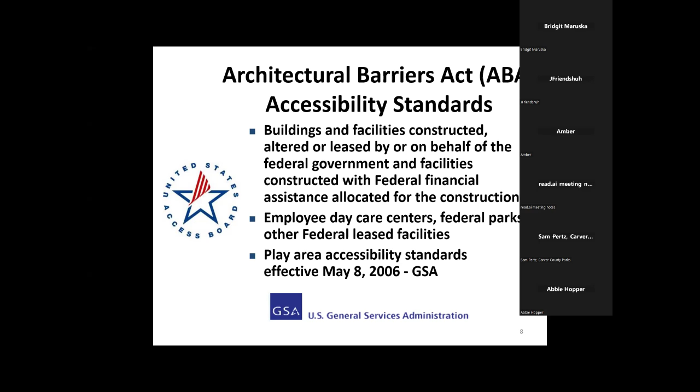And why that's so important is that persons with disabilities like myself—if I went into a bathroom on a federal Park Service or Forest Service toilet room, and then went into my city or county local toilet room, or went into the McDonald's on my way home, or used the bathroom at the hotel I'm staying at—the idea that those minimum requirements are the same throughout all those facilities helps people with disabilities understand if I can do that independently, which is the goal. That's our goal of providing access: making sure people of all ages, all abilities have as much independent access as possible.

And so if I can't do that independently, I know I need help everywhere I go. And that's an important feature with the standards. Really what the Access Board worked on was to make sure that we consolidated those requirements, easier for designers, easier for people with disabilities to understand that the requirements are across the board now.

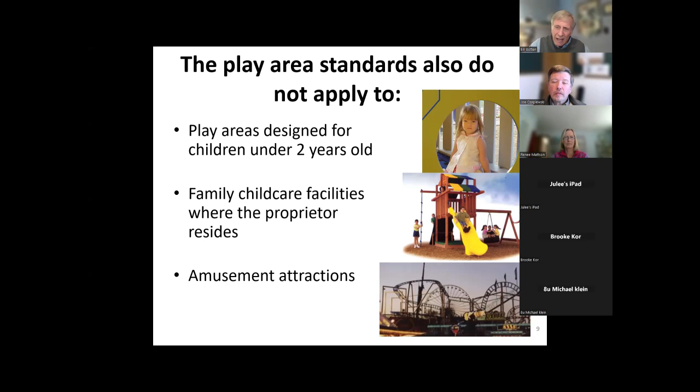The play area standards also don't apply to play areas designed for kids under 2, those really small ones. If your family has a child care facility at your home and you live there, and amusement attractions are not considered a play area.

I told you earlier on that if you have the 2010 ADA standards, you don't have the whole book. Because it references other things, like for platform lifts, for elevators, for fire alarms, and for playground surfacing. Not knowing all the technical requirements for play surfacing or having the expertise, standard setting agencies rely on other organizations like the National Fire Protection Association, the International Building Code. They rely on other voluntary standard organizations to develop standards for specific issues like elevators, platform lifts, fire alarms, and playground surfacing.

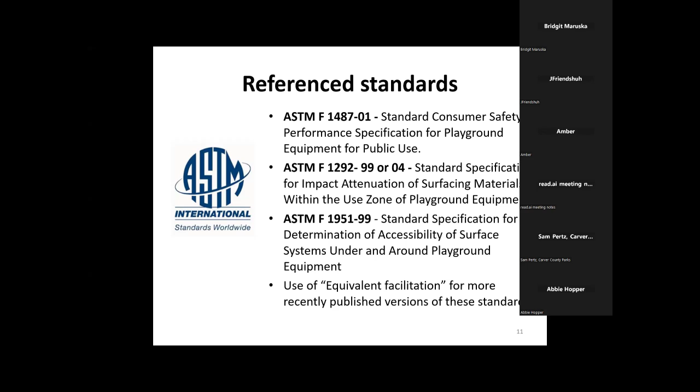When you talk about playground surfacing, it's ASTM International. And ASTM International has 3 different reference standards that apply in play areas. The first one, 1487, defines what we call the use zone. And I'll talk more about that in a second.

1292 requires you to have fall attenuating surface. If somebody takes a header from 6 feet, 8 feet, 10 feet, 14 feet, you need a surface that protects at all those different levels. That reduces the level of injury. So there's a test where they drop a head form, and I'll show you more of that in a minute, where they drop a head form and take an evaluation of your surface material.

If your surface material is freezing, it's probably not being very fall attenuating. You really need to consider that the surface you're putting in is something that, over time, is going to facilitate access through your environmental cycle, right? And if you're going to do a unitary rubber surface, you need to know exactly how long that's going to last. You need to test it throughout its life cycle, to make sure that kids are not in danger.

Typically, when I've seen litigation on play areas, it's because somebody got hurt first, and then they look at the accessibility as well. But typically it's the lawyers for those that got hurt who are coming out to see if your surface is compliant. That's typically how it works.

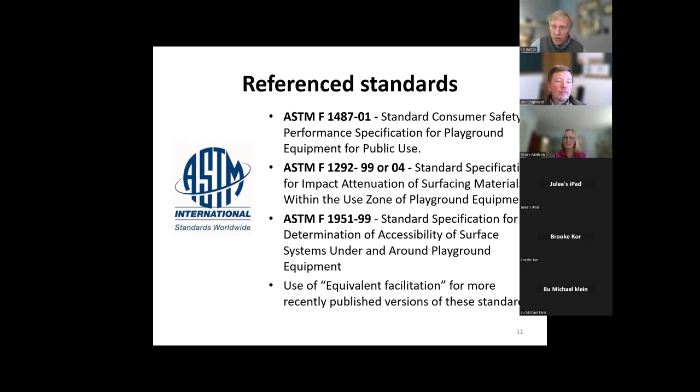ASTM F1951 is the wheelchair workability requirement. It basically talks about how hard it is to push through a surface like engineered wood fiber, push through rubber tiles, push through a turf surface. So you have these competing factors, right? You have this requirement for you to provide accessible routes so somebody in a wheelchair can get there, but also that it's soft enough so that when somebody falls, you're preventing as many injuries as possible.

I told you that 1487 is that use zone requirement. Based on the height somebody would fall, there's a circumference or a diameter all the way around that play component that establishes where that surface has to be fall attenuating. So typically when you're way out by the sidewalk and just coming into the play area, that surface often needs to still be accessible, but it doesn't need to be fall attenuating because you don't have a piece of play equipment that somebody would fall from.

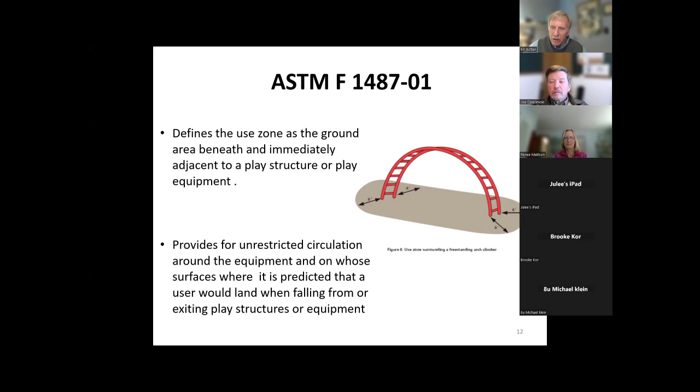Now, when you're in a motor vehicle, the HIC is only 700. I fought for years to try to get that 1,000 lower to provide surfaces that were more accessible, but it hasn't come through as a standard. So there are areas like even riding in a vehicle where the HIC is lower, and on sports fields it's lower than in play areas, but play areas still allow a very high, in my opinion, head impact value.

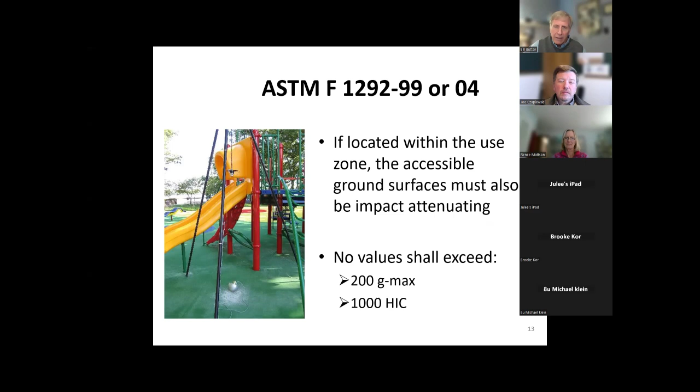It measures the amount of work somebody uses to push those wheels to go up, and then what it does is take that playground surface and install it in a test bed, and you go for four pushes on a 90-degree turn and in a straight line. As long as that surface doesn't require more force than it did to go up that 7% grade, your surface is good to go.

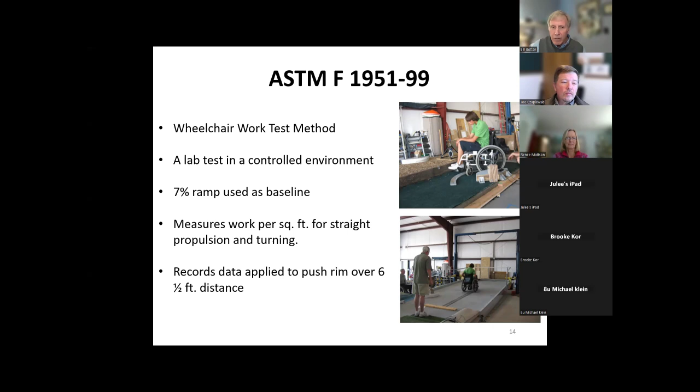There is not a field test right now for this. That's what I've been working on for more than 20 years, and I'm still chairperson of a committee in what we call the Rehabilitation Engineering and Assistive Technology Society of North America, RESNA, where we're hoping to be able to evaluate all kinds of surfaces—trail surfaces, play area surfaces—for firmness and stability, because that's the requirement for accessible routes. But right now, this is the requirement for wheelchair workability.

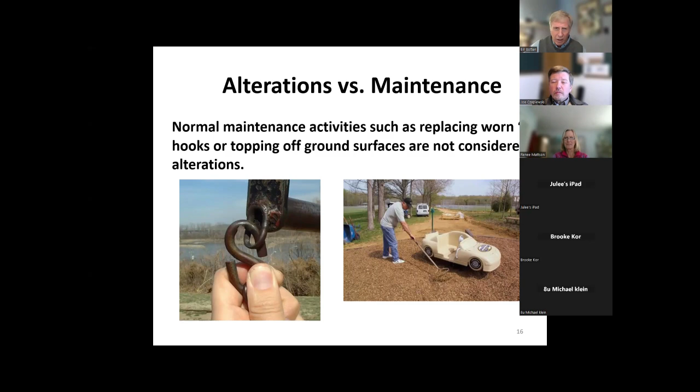But if you're doing something we consider affects usability, that's the real key. Does it affect usability? Like changing the surface material affects usability because it's scoped. So understanding the difference between: is this normal maintenance, am I replacing it to just like it was, am I just making sure it's safe and not going to hurt anybody, or am I actually changing the usability of something, changing a different play component?

Alterations that could affect or do affect the usability of a play area are considered an alteration. Examples could include removing a climbing or play component and replacing it with a spring rocker or some other type of play component, or changing that ground surface—that would affect usability and is considered an alteration.

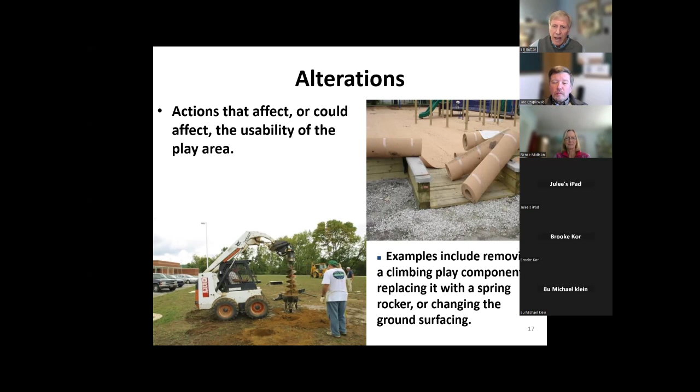When you do an alteration to what we call a primary function area—I'm on slide 18—there's this additional obligation. It doesn't only apply to recreation facilities; it applies, say, if you had a building and you altered a classroom, or altered the main reason somebody comes to it, like a visitor center lobby. If you alter a primary function area, there's an expectation that you provide what's called a path of travel obligation. That means we don't have just these pockets of altered primary function areas—in this case, a play area—there's an expectation that now you try to get people to that altered primary function area.

So it's 20% disproportionality—that's the rule set by the Department of Justice. The expectation is that when you alter, you remove the play surface and do a new play surface, you've now altered a primary function area. In that alteration, you now have an additional obligation to get somebody to that altered primary function area, up to 20% of the total cost of that alteration.

More of that information can be found at the Department of Justice website, and I'll give you that when we're done. But it's so important to think about whether you're altering this primary function area—there is an obligation to make sure somebody has, maybe, a parking space to park at, an accessible parking space, maybe an on-street space, maybe a passenger loading zone at a school. But then the accessible route—that route that connects from that site arrival point, maybe through the park to the playground—now has a requirement that you spend up to 20% of that alteration cost. There is an opportunity to use small projects over a series of multiple years, combining that money to come up with the overall cost of what the alteration to a path of travel might be.

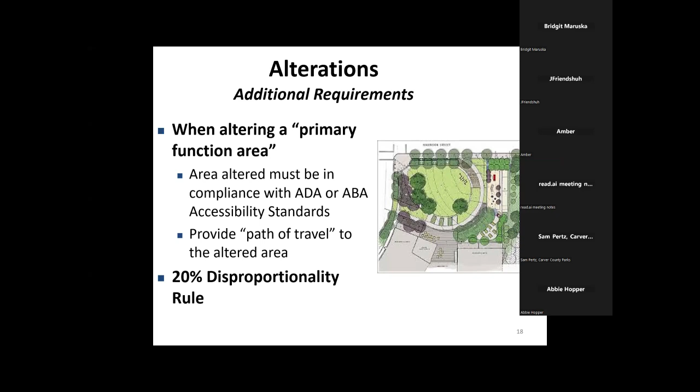So when we talk about path of travel, we're talking about altering a primary function area. We're not talking about the way that somebody goes—we're talking about that requirement for additional money to be spent towards the accessible route of getting people to that altered primary function area.

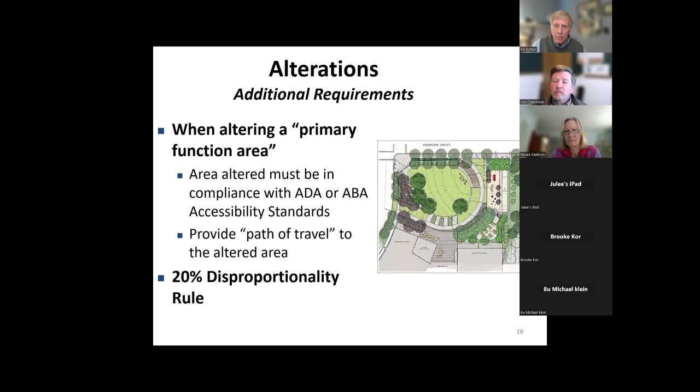I'm going to clarify some terms as we move into the next idea. We went through some application issues, right? We talked about when it's required, what law requires it, and when you have an opportunity to do it on existing facilities, alterations, or maintenance.

Clarifying some terms of the application of the play area standard - they have to define what a play area is. It contains play components designed and constructed for children. It's really designed and constructed for children and adults, I think it should have said.

I don't like to see this. Imagine the trip hazard that causes between surface material types. My kids always knew how long my arm was - they'd be at the edge of that turf exactly that length away when it was time to go home, or if they did something wrong, or I wanted to come get them. That's how they knew how long my arm was.

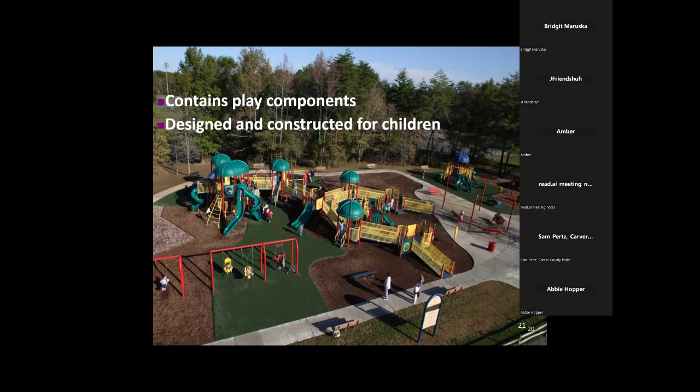Access to the full play area is how we make them inclusive. That's how we ensure everybody has the same opportunity to run, play tag, and do everything - not stay on the hard surface, not stay on the areas defined to be accessible, but the whole area.

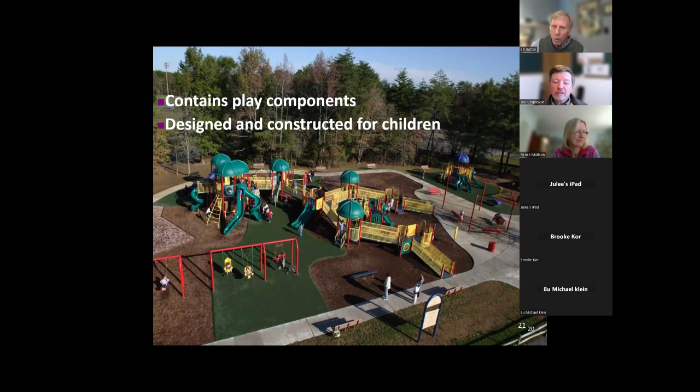There are requirements for outside the play area - I'm showing you a route coming over to a play area. Once you get inside the play area, accessible route requirements change. Just one example: outside the play area, you can have a 36-inch route for up to 200 feet before you have to go to 5 feet just so somebody could pass. But once you get to the play area, now you have a 60-inch, or 5-foot wide, route throughout the play area connecting those elements required to be accessible.

The important thing to understand is you have to connect elements and spaces on the same site with at least one accessible route. That's the real trigger - all elements and spaces on the site have to be connected by at least one accessible route. Here I'm showing a hard surface that went all the way behind this play area, but they've got this other route that comes up to it. I drew that white line to emphasize that now we're going into the play area and the requirements are different.

That's not a curb. But the idea here is that you only need one route to a play area, and that one route needs to be accessible. You could have another route that has stairs, or is a steep slope, but you're going to have one route that gets somebody with a disability on an accessible route, hopefully the common circulation path.

That's a really key thing - don't send the person with a disability around to the backside when everybody else just comes to the front. The idea is that the whole family goes together. So the real route to this play area is shown here as the family walking together. That's the common circulation path, and it should also be the accessible route.

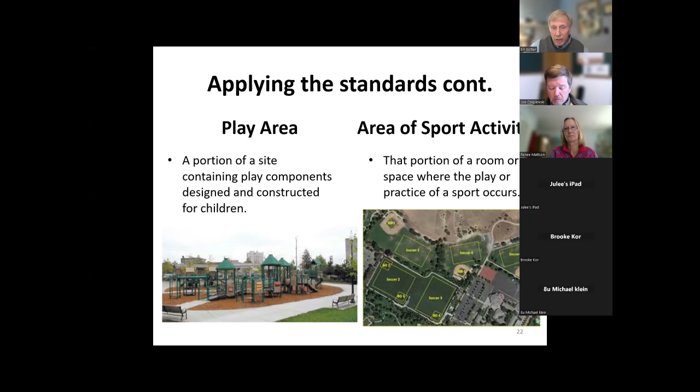If you separate your play areas geographically, one side of the building to the other, you're required to make sure that both of those comply in new construction and whatever you alter.

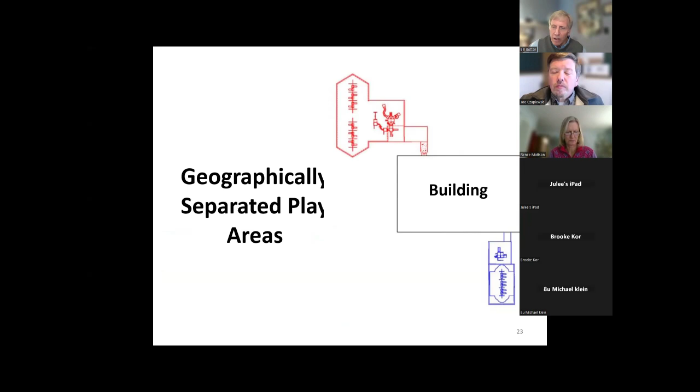So what's a play component? It's designed to generate that opportunity for play, socialization, and learning. Now a lot of manufacturers will start saying, I have upper body climbing, I have lower body climbing, I have a bumpy slide, a circular slide, a wavy slide, and they'll try to type a whole bunch of different things. Really look at the expectation here. The standard talks about sliding, swinging, climbing. It really breaks it down to, when we talk about one of each type being accessible, that you break it down to the real form of what's happening there.

Sliding, swinging, rocking—here you see one on the left where they're digging. The idea is that one of each type is going to be accessible at minimum. When we talk about nature play components: felling a tree, putting a bunch of rocks, making a grass mound, a turf mound—there's a big emphasis to make urban parks more rural, like climbing on a tree. The expectation here is you still get to it, you still get through it. One of each type still has to be somewhat accessible to get to.

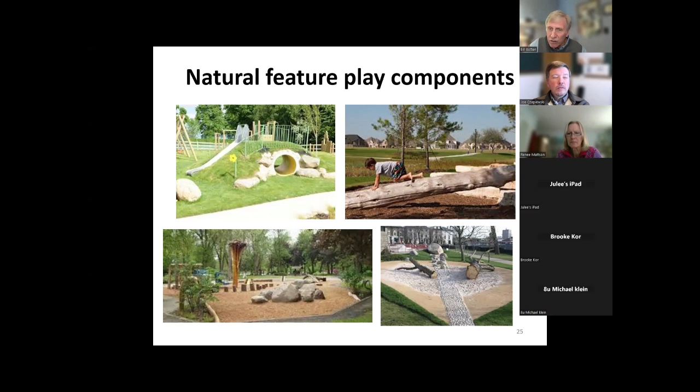So the surfacing material would be the key factor. If you're creating mounds and putting things on top of mounds, it's going to be considered a composite play structure. Once you create a composite play structure, you're required to either provide transfer or ramp access to the top. If it's just a mound, you could get somebody off at the bottom and they scoot and climb and roll on the mound. But if you provide a whole bunch of elevated play components on top of your mound, now you're going to need either a transfer system or a ramp to get somebody up to it.

What's not a play component? The transfer system, the steps, the decks, ladders, roofs. Your kids might be on the roof, but that's not considered a play component.

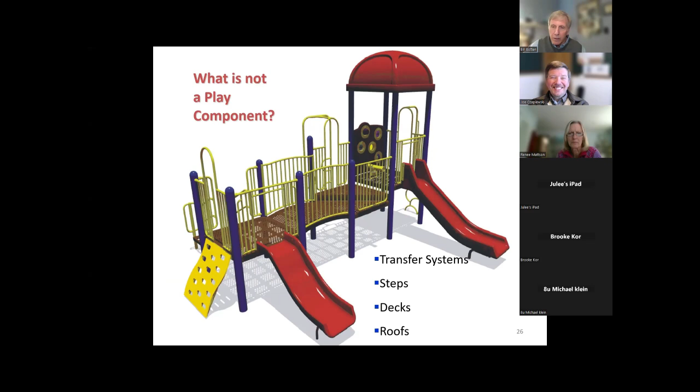Ground level play components are approached and exited at ground level. I'm showing you some ideas here—this thing you spin in makes you sick, the swing on the left-hand side, or this whale coming out of the sand. Those would be considered ground level because you get on and off at ground level.

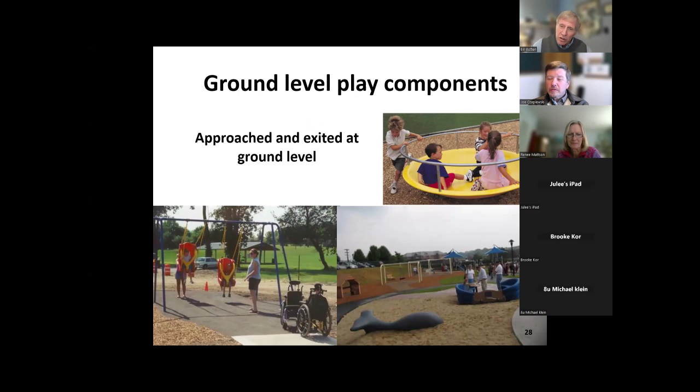An elevated play component is one that's approached from an elevated level. Now there's a lot of things that are said to be functionally linked—things that are functionally linked to a composite play structure, maybe a series of stepping pods, or something like a track rider that you shoot across from a large composite play structure. Whenever you talk about functionally linked, really look to see if the only way on or off that thing is at ground level.

I'm showing you some here where it's a block climber on the lower left, where it reaches an upper level and you could get off of it. It's only counted once—that would always be elevated. I'm showing you where a person in a wheelchair is at an upper level, like a play component panel, coming out of their wheelchair—all of those would be considered elevated because they're on an elevated level.

If you have a slide coming off of an elevated level, unless it's standalone, it's always considered elevated. It's important to understand the differences because the standards require different percentages or numbers of ground level play components and elevated play components to be accessible.

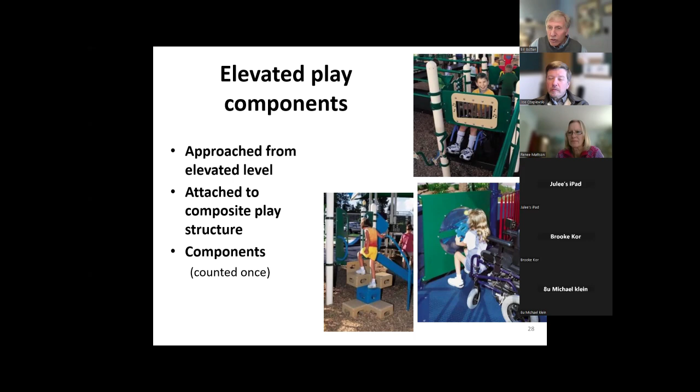When you go in and evaluate an accessible play area, you have to determine which ones are your accessible ones—which ones you have to have a route to, because elements and spaces on the same site have to be connected. So you need a 60-inch route connecting to that spring rocker, to one of the swings, to you. When you understand which ones are accessible, you can understand what routes need to be accessible as well.

Just to go back one more time, you see the one on the left is always ground level—you're only on it at ground level. The ring climber on the right is an elevated play component because it can be reached from an elevated level. It's only counted once, always counted as elevated.

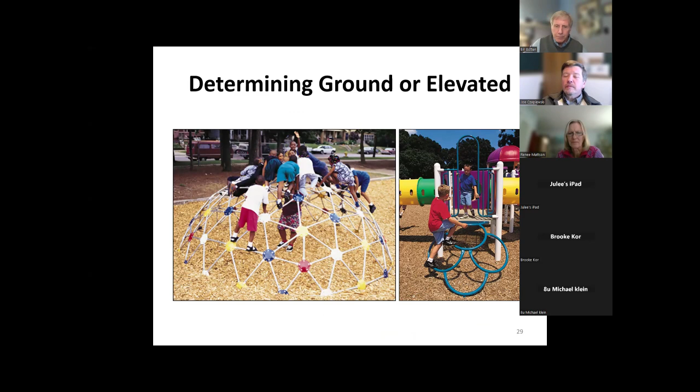So ground level scoping provisions is the requirement of how many of what, and at ground level, it's a requirement of one of each type.

Here I'm showing you sand around a play area at a beach I took, where I've circled two swings that are underneath this rubber mat. That rubber mat was a series of tiles that provide an accessible route all the way to those swings only. A sand digger on the one where I've circled below, where they've created a concrete area where somebody in a mobility device could not sit out in the middle, but sit on that hard surface and still use those elements to create that backhoe idea. And then here's a talk tube or some type of a panel on the left.

So it would require one of each type of the components you have at ground level, whether that be rocking or swinging or whatever the element might be. One of each type must be accessible.

Let me back up and just briefly say that we're talking minimum requirements. I'm hoping you do way better than this, right? We want way better than one.

Here I'm showing you, even with those sand diggers and the swings, that they're incorporating a couple of them, providing not just a strap swing but an adaptive swing seat, which facilitates greater access to some people. But I'm hoping that you go beyond the minimums.

I often say in my training sessions that if you're only doing the minimums, it's a D, okay? You pass, just barely you pass. You did nothing special, right? We didn't incorporate anything to make sure that everybody still gets to participate.

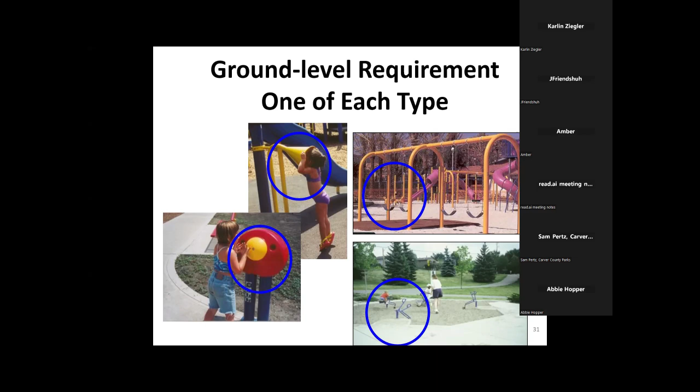Maybe somebody that can't hear, see, or walk. Maybe you have somebody that is on the autism spectrum that needs a quiet, shaded area. How are we facilitating that access? How are we protecting them from maybe elopement, where they want to run, with some type of landscaping or fencing? What are we doing to make sure that we're inclusive to everybody throughout the whole facility?

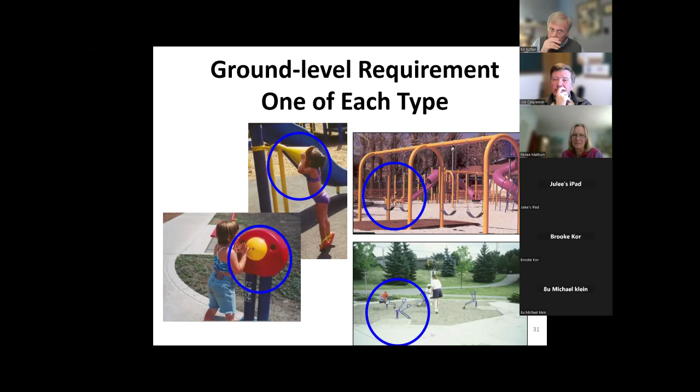So hopefully way beyond the minimum, but that one must be integrated into the play area so that everybody has an opportunity to play together.

There is a requirement that if you start doing just a whole bunch of elevated play components, it triggers more ground level requirements. Based on the number of elevated play components you provide, there's also an additional requirement to make sure you've got enough at ground level.

So if we just looked at one example, the 11 to 13 range, say I had 11 to 13 elevated play components. The middle column says the minimum number of ground level play components to be on an accessible route was 4. And then the last column says the minimum number of different types of ground level play components required to be on that accessible route is 3. So you can see you might have 2 of the same and then 2 others at ground level, based on how many elevated play components you put in your play area.

So it's just a trigger to make sure that somebody who may not be able to leave their mobility device has opportunities at ground level, and not everything's at an elevated level.

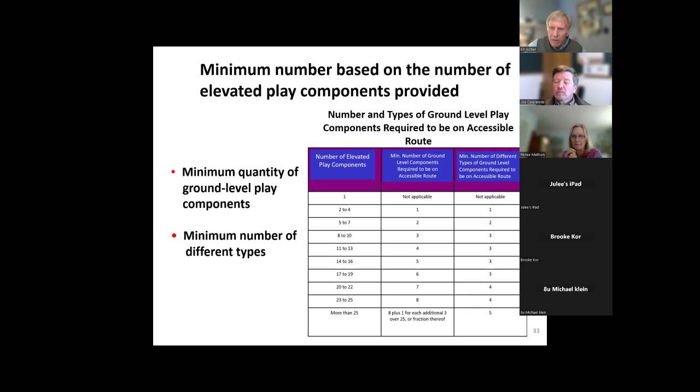Some of the technical provisions involve providing a vertical clearance to ground level play components. This can be challenging if you're doing playhouses, things where you've got to duck to get into, but at least to the door or the entrance there has to be an 80-inch vertical clearance at ground level.

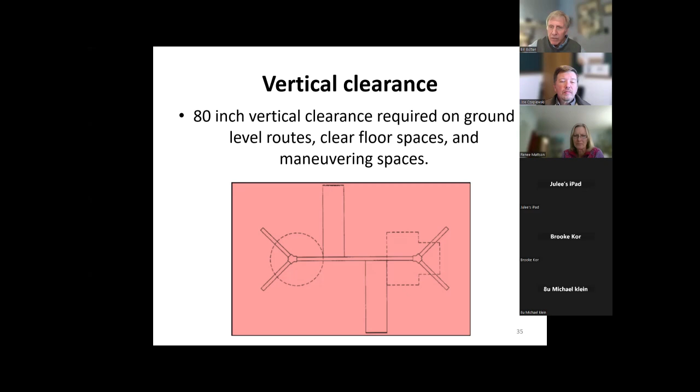It also requires what I'm showing you here, what we call clear floor or ground spaces. So at the elements or play components that you're going to designate as accessible, you would need a wheelchair parking space on that same accessible surface. So you got there on a 60-inch route, and now I've got this accessible surface underneath or around that piece of equipment to make sure that somebody with a mobility device can access it.

The ground level accessible route requirements incorporate all of these different technical requirements - the type of surface it is, how wide it is. I told you 60 inches, but there is the ability to reduce that down. Changes in level are no greater than a half inch.

That stuff is hard to maintain if you have a lot of kids on it. Imagine several hundred kids coming out multiple times a day at recess. How do we ever maintain that loose fill product? So understanding the type of surface you have and the people that are using it, and how to make sure you have access to it the best, is some of the things we're going to talk about.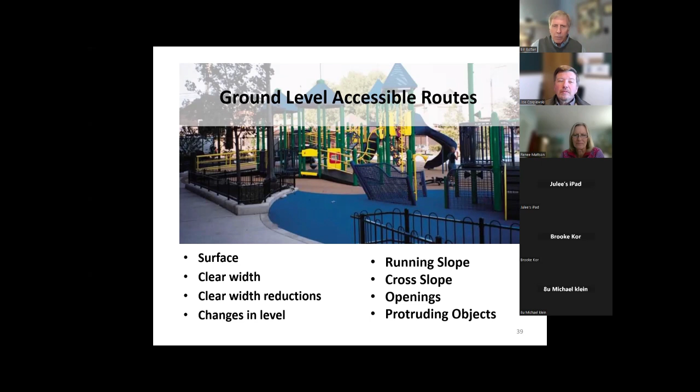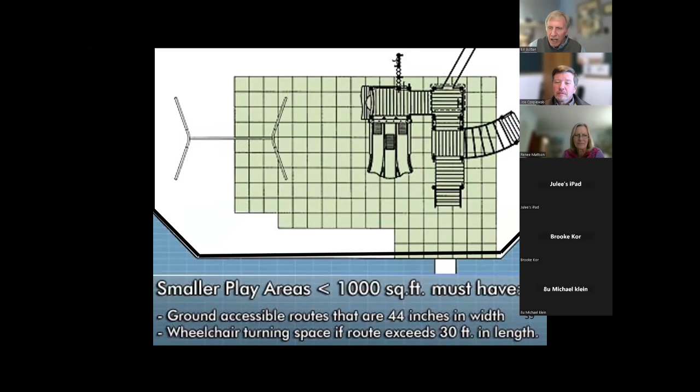The requirement for running slope, cross slope, openings, and also protruding objects where we just talked about an 80-inch vertical clearance. We're asking for a 60-inch minimum clear route that allows two persons in mobility devices to pass. In smaller play areas there's a requirement that you can reduce from 60 inches down to 44 based on the size of your play area, to limit the size of those accessible routes. You could even narrow it down to 36 inches for a distance of 5 feet if you had to get around a tree or something else, similar to an accessible route outside the play area.

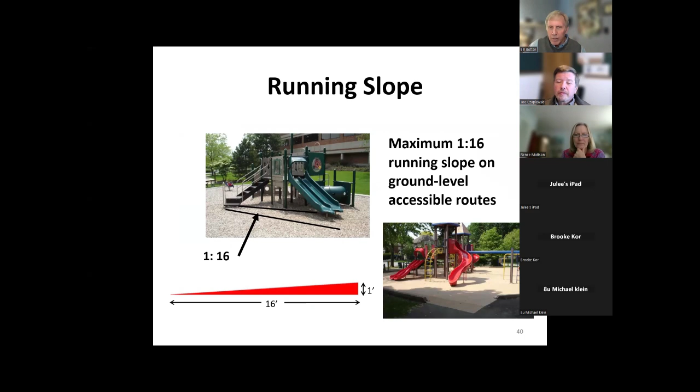In a play area, you can have a 1 in 16 running slope, or a 6% grade, at ground level and still be considered accessible. So you can have up to a 6% running slope. The cross slope is always 2%. So here's the challenge: you have a cross slope at 2% and a running slope no greater than 6%. But how do you do that and make sure you can run in all different directions, so that your clear floor spaces, your turning spaces, access to one of each type along the accessible routes are all no greater than a 2% cross slope and 6% running slope?

Well, you need to know where your ground level play components are, and where your entry and exit points are for your elevated play components, to identify those places that have to meet those requirements and how somebody would get to them. Typically, the best way to do it is to ensure that the play area is no greater than 2% in all directions, all the time.

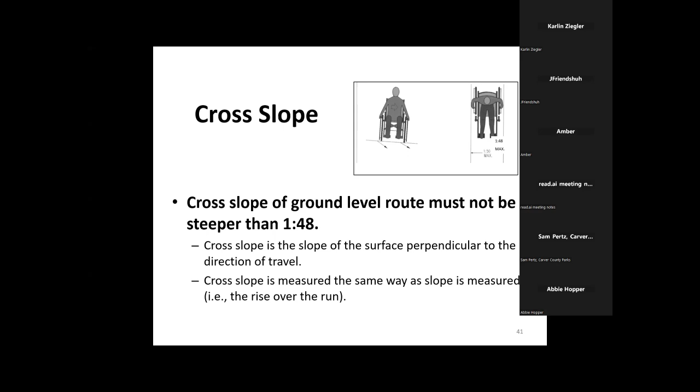That can be very challenging for a contractor pouring a unitary rubber surface or somebody doing the underlayment of a turf surface that's going to come into your play area. That can be very challenging to ensure there's no greater than 2%. But what you do have to ensure is that along those accessible routes, it is no greater than 2% running cross slope.

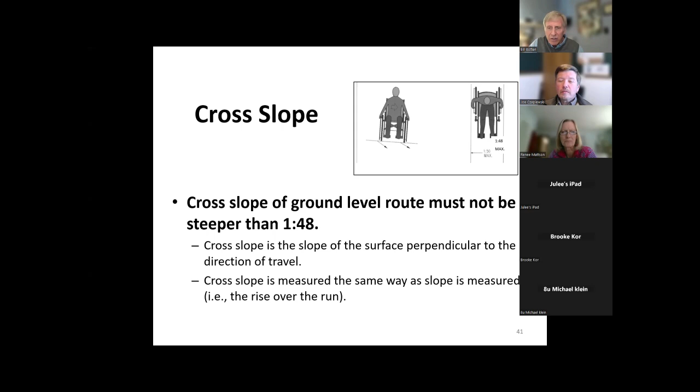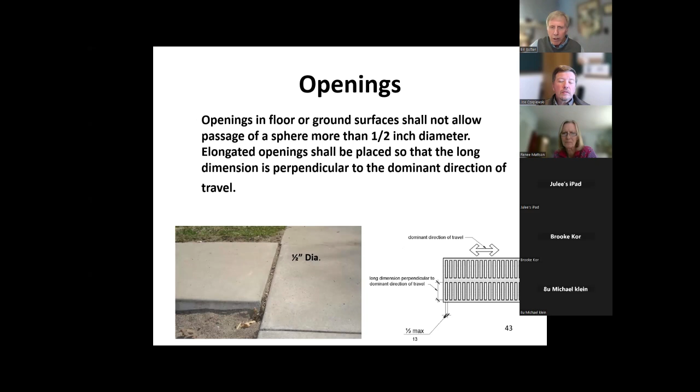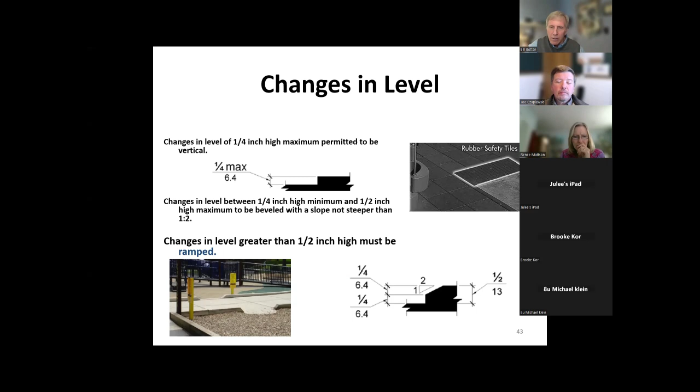So always make sure you keep running that into zero and let your loose fill migrate up onto it. Carpet—there is a requirement for accessible routes to have no greater than a half inch pile. This has been a real challenge for the turf industry because they're saying they can do a 1.5 or 2 inch pile and infill it up to that half inch and still be compliant.

I'm a person who uses a manual wheelchair. I understand how hard it is to push on a shag carpet with a big pad—and that's what you're asking people to do right there, a shag carpet with a thick pad, if you're infilling it. It'll be interesting to see. The Department of Justice, the enforcing agencies, have not come down on any of this yet, if you're going to do turf and you're providing wheelchair access.

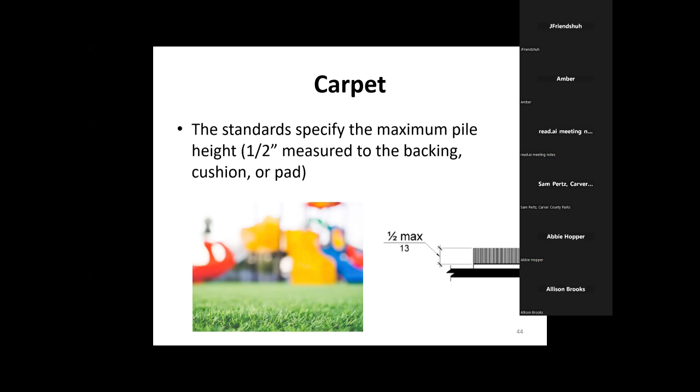Now, if you did a mound and it was just a mound, you can have whatever height pile on that you want, because now it's a play component—you're not going to provide wheelchair access, remember, unless you have a whole bunch of stuff up there. But if it's just a mound, you can do turf at whatever height you want. But if it's on that accessible route, connecting those elements and spaces that are required—those play components at ground level and entry and exit points at elevated areas—you want to make sure somebody can actually use that stuff.

And by infilling with coconut husk or loose rubber - we've all got that at the house too, right, from somebody playing on a sports field. You got that rubber crumb in your dryer, your wash machine, your car, your shoes. It's the same thing here. They're infilling the loose rubber with that turf.

And so I think it makes it a lot more challenging. I think about a young person trying to push a manual chair in that. The only thing that's good about it is it prevents injury, and it's a unitary surface when it's done right, so it's easier to roll on - not the amount of force, but there's no change in level. There's no irregularities that make it tough. It's all a unitary type surface.

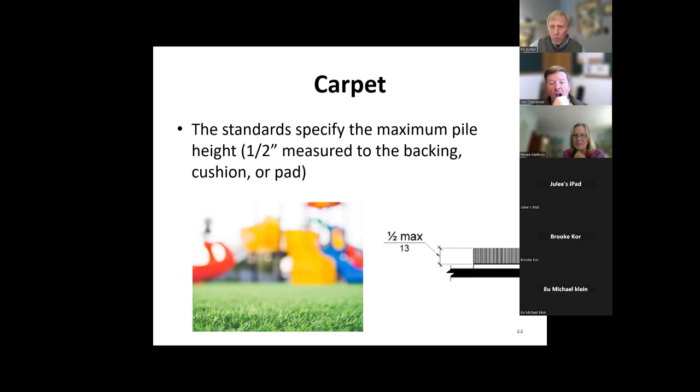So just be careful when you're doing turf. I would require the thinnest, shortest pile possible with the least amount of infill that you can still reach those fall height head impact tests. I already told you it's an 80-inch minimum vertical height requirement on an accessible route at ground level.

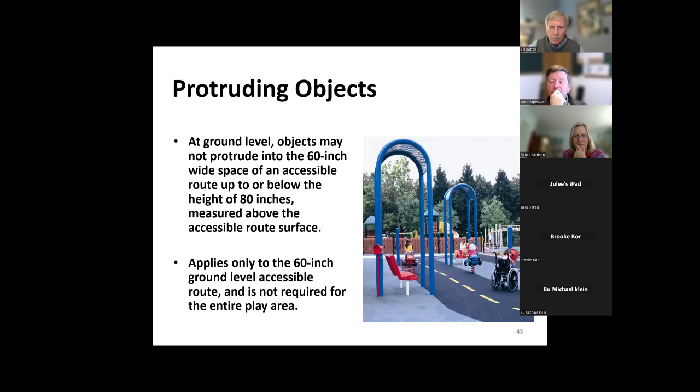So here we go into play surfacing. There's a lot of different types. The National Center on Accessibility, now called the Eppley Center, at Indiana University, did a 7-year study with the Access Board, and I was the staff person that helped run that. Here we're just showing where we were testing, but we tested surfaces over a 7-year period.

Engineered wood fiber, which is a hammer-milled wood chip. We did rubber tiles. We did a turf. We did a unitary surface.

The loose rubber people would not participate. They didn't want to participate because it can't make it accessible. So if you're doing a loose rubber, I really challenge you to see if you can make it accessible. I don't think you can.

Out of that study came a document that's available at the U.S. Access Board's website under research, called 'The 7 Things Every Playground Owner Should Know About the Accessibility of Their Playground Surfaces.' Here's what I got to tell you.

Don't just buy it and walk away. Make sure whoever sells that stuff to you gives you a warranty, and test it upon installation. You need to know how long it's going to last. Test it throughout the life cycle of that product so you make sure everybody's safe.

If you're freezing solid out there, it's not safe for kids to be on, right? Somehow you need to make that aware on your websites or in information, to let people know it might not be fall attenuating when the temperature's under a certain point and has been for a certain period of time. Give people warning about that kind of thing. So understand your playground surface, test it, okay?

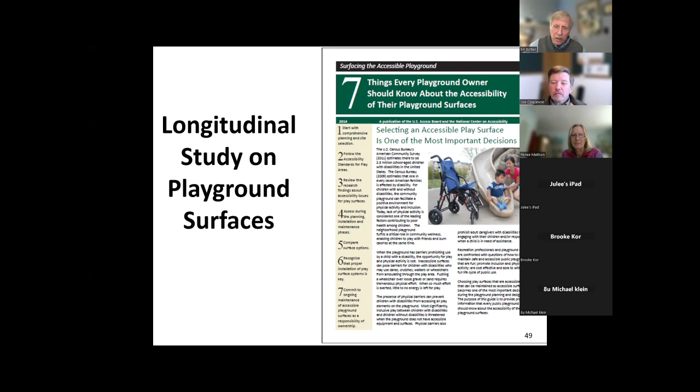My next slide shows you that there is going to be a field test soon for the 1951. On the right side, it's called a rotational penetrometer - they're now changing it to instrumented surface indenter, ISI. And the one on the left is the triax, where I showed you how they drop it at the same height as your playground equipment and try to determine that head impact value.

Buy the surface, get a warranty, understand how long it's going to last, test upon installation through the life cycle of the product, and know when you have to budget for a whole new surface. It can be two-thirds of the cost of your play area. It could limit what you have in your play area just because the surface costs so much.

That's why people do engineered wood fiber - it's the cheapest alternative. If you're going to do engineered wood fiber, you need to continually compact that, especially when it's wet. Compact it when it's wet, put two inches more in there, wet that, compact it again to bring it up to the level you need. The only way it's going to be accessible is if you vibrotamp and compact that surface on a regular basis.

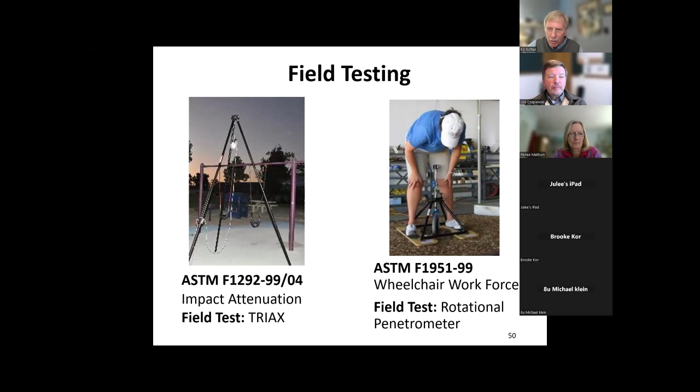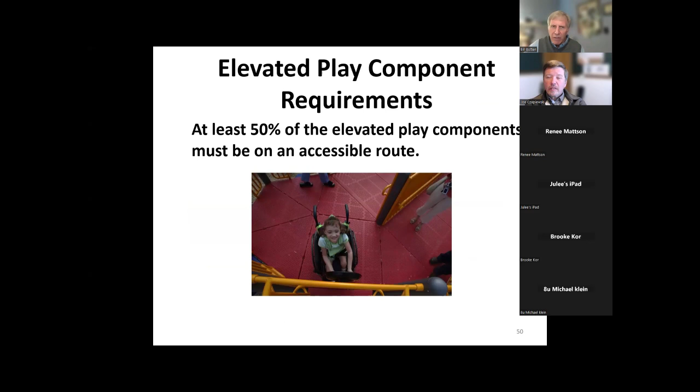Elevated play components require 50% of them to be accessible. Remember, at ground level I told you it was one of each type. Elevated, it's 50% of the elevated components that have to be on an accessible route. And that accessible route is permitted to be a series of steps and a transfer platform if you're under 20 elevated play components. That's why you'll find a whole bunch of these with 19.

Okay, they'll have 19 so they can provide transfer and they don't have to do a ramp. Because once you hit that 20 or more, now you have to provide a ramp to at least 25% of the 50% required to be accessible.

Only a few. I advocate that more ramps should be used. If you provide more ramp access, you don't have to do additional ground level work in that chart I showed you earlier.

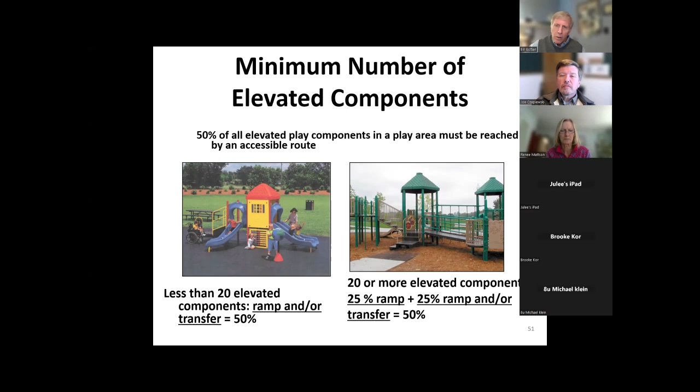But if you're under 20 elevated play components total, the requirement is you can use the transfer system, that's a transfer platform and a series of transfer steps, and that can be really challenging. Imagine a whole lot of kids running around on that play surface, that deck all over everywhere, and you're scooting or crawling, or the surface is dark colored like this and it's been out in the sun all afternoon.

So it can be really challenging for somebody that's crawling or scooting when everybody else is running. Providing ramp access to 50% of the play components doesn't require any additional work at ground level. Earlier, that chart I showed you was based on a whole bunch of elevated components with nothing at ground. Now you've got to do more at ground level.

If you can ramp 50% of your elevated play components, there's no requirement to do anything additional at ground level. That elevated accessible route is 36 inches wide. Exceed it whenever possible. You want 2 people to be able to pass like what I'm showing you here, and that requires 60 inches, or 5 feet.

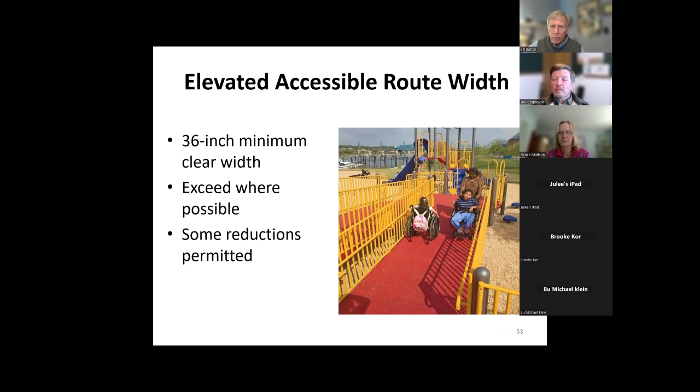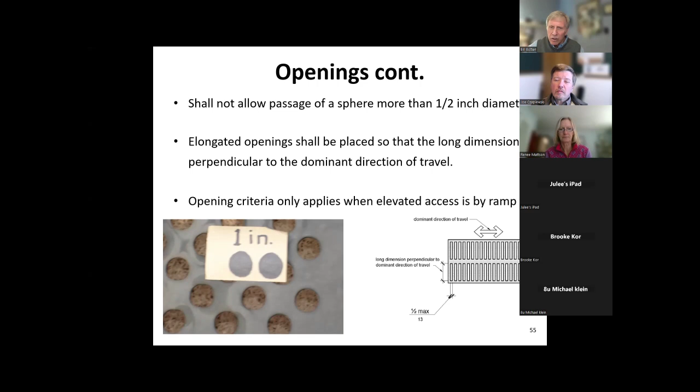There is a requirement that you can reduce it down to 32 inches, similar to going through a door. Anytime you have wheelchair access, there's still that opening requirement. You've got to look at the punched holes in that surface material, no greater than 1/2 inch. If they're elongated openings, then they're perpendicular to the direction of travel.

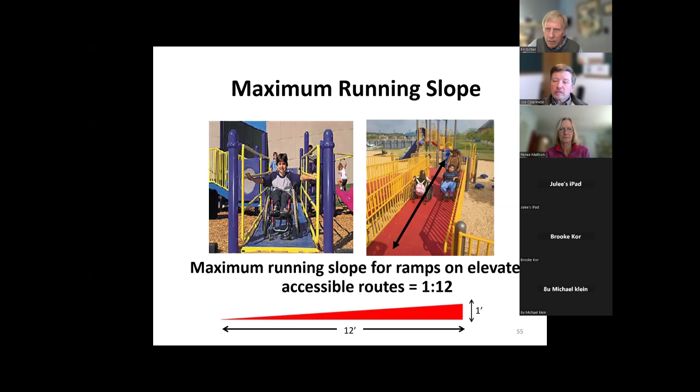Whenever you ramp to an elevated play component, the maximum you can go up is 12 inches. You can have a maximum running slope of 1 in 12, but you can only rise 1 foot. Whereas in the built environment, a ramp into the front of a building allows 30 inches of vertical rise before you need a landing. In a play area, you can only go 12 inches of vertical rise before you have to have a landing.

That's why you see a lot of this being done. They want to get you to a higher height to get a good slide, or a pole slide, or something else, so they want to be able to get you up higher, and each ramp run can only be 12 inches of vertical rise. So how do we do that? We start with a berm, we sink the play area, that's how they try to get you up higher.

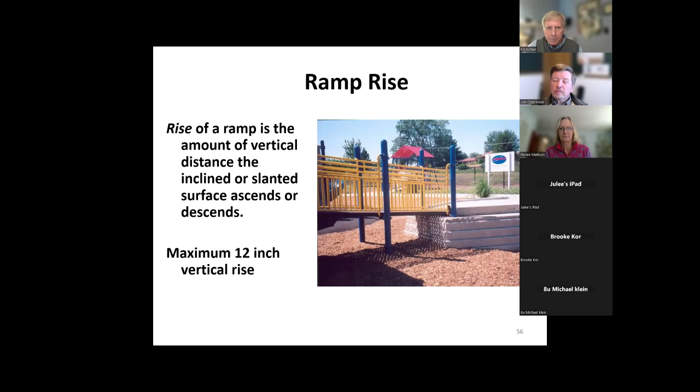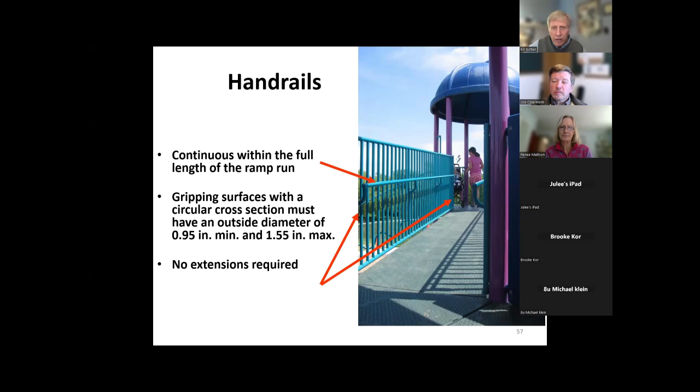There is a requirement for handrails on those ramps whenever you ramp, but there is not a requirement for 2 handrails. Now, you can say the top of the guard is your upper handrail, you can use that, but the only thing required in a play area is a lower handrail. That lower handrail is between 20 and 28 inches, 1.5 inches away from the side surface.

It does require edge protection. Whenever you have a handrail, you have to have edge protection. You can either extend the deck by 12 inches or make it so a vertical sphere less than 4 inches doesn't pass through.

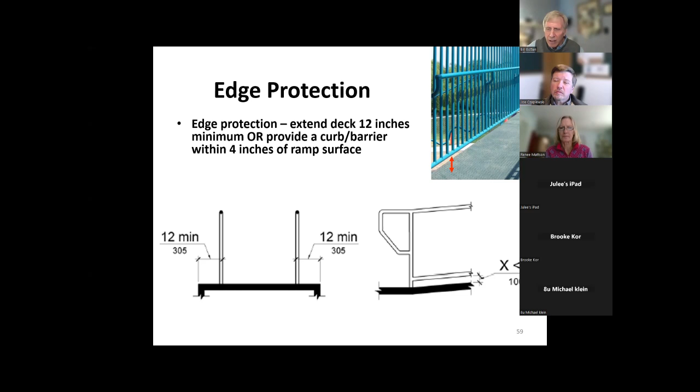I told you that after every 12 inches of vertical rise, or a 12-foot ramp, you have to have a level landing. If it changes direction, it's 5 by 5. If it doesn't change direction, it's 5 feet in the direction of travel, and again, 36 inches minimum width.

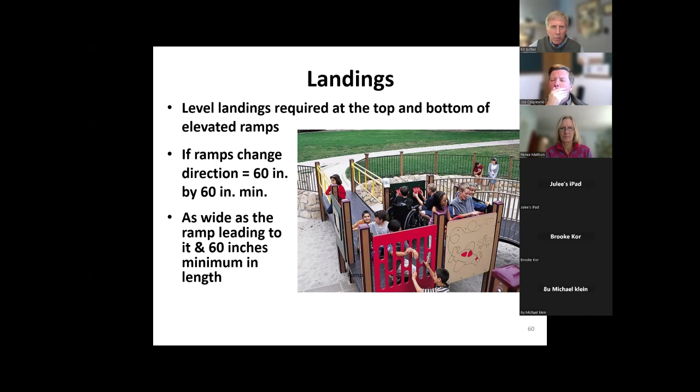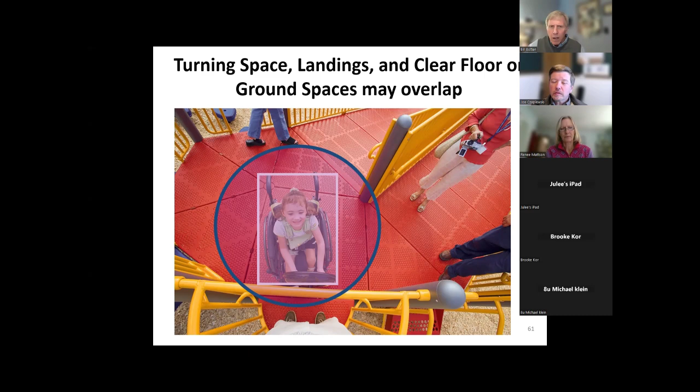So the more space up there, putting elements where play is going to occur in a landing area that's out of the way of traffic is always something to consider.

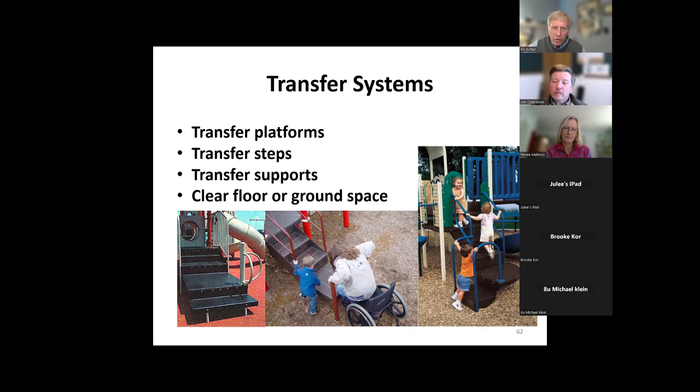Here I'm showing you a first transfer system picture. It includes a transfer platform, that's that first place you see. It's a 24 by 14 minimum. It includes transfer steps, transfer supports, and that wheelchair parking space right adjacent to it. I already told you that less than 20 elevated play components can use that transfer access to get to those 50% of elevated play components, so it could consist of that platform and stairs.

Here I'm just showing you a couple different ways of doing it for somebody to crawl or bump up. This is really challenging, I got to admit, I can't do it, I'm old. But scooting around on that hard surface, if you're in shorts and that surface is hot, or there's an opportunity for skin breakdown, things like that can really limit the ability, and whether or not you have the arm strength can really limit your ability to interact with any of that play opportunity. And that's what it's really about, right? Trying to provide that independent access as best as possible.

So your transfer platform could be odd shaped. Here I'm showing you, I typically bring a piece of cardboard for things like that, 14 by 24, lay it on it, show that it's clear, you can jump onto it. It's at least 11 to 18 inches above the surface, and that 24-inch side is unobstructed, and there's something to grab onto. It seems like the transfer supports anymore are holes in the platform, a wide, long, oblong hole. Those are permitted. It doesn't say what that transfer support has to be, but anytime you can get an arm at an elevated level to give additional leverage, it is easier to transfer. So here I'm showing you a couple different ways that people would use a bar that's not obstructing the way to get on, but still could be used for transfer.

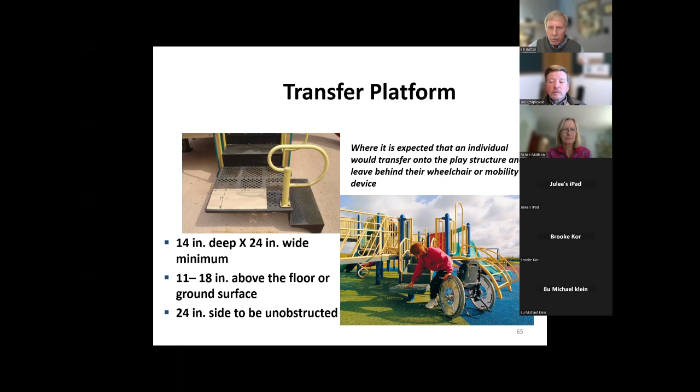Again, just the minimum size requirements. Each stair can be up to 8 inches. 8 inches is huge for a little kid to transfer up while they're scooting. I suggest way less than that.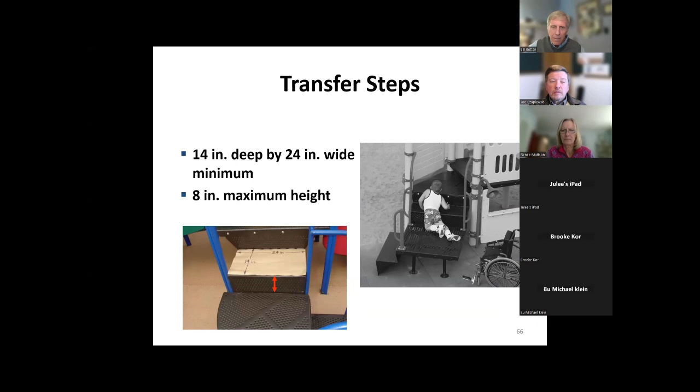Transfer supports, it just says a means to get on. I'm showing just a couple different ways. Remember that the motion is going to be downward. If you have a vertical pole, the only way to use it is on the top, like I'm showing you. So many times people will put a vertical pole there and say it's my transfer support, and it's too tall to use as a vertical support. What are you going to do, grab a hold of it and use it? It's just too difficult to do. So realistically, look how you're doing that.

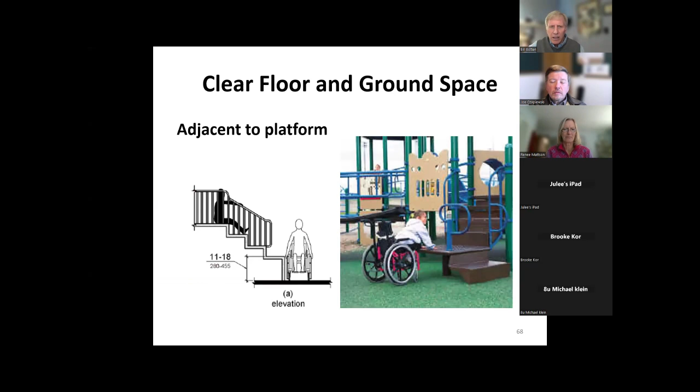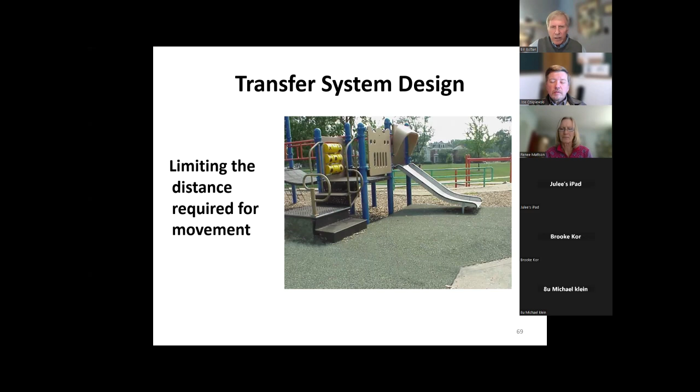Again, 11 to 18 is where the transfer platform is off the surface. Limiting the distance between the slide and the transfer platform - okay, I've crawled all the way up there, I've come down the slide, now I got to go back over the transfer platform to get back up, right? So limiting the distance there can really enable someone to get back to a mobility device or crawl to that other surface material. Here again, I'm showing you a rubber overlay that they're doing over an engineered wood fiber surface, and they've only included that in the areas that they've had to be required to be accessible.

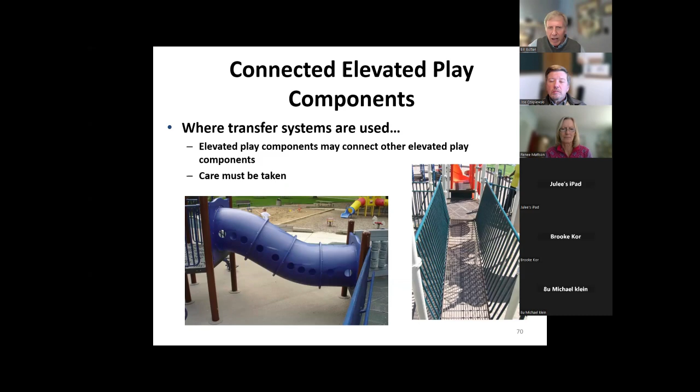Play components can be used as an elevated accessible route. So I'm showing you a crawl tube on the left, you could crawl to that area, and then that crawl tube would be considered a play component as well as part of your accessible route. Accessible play components have a clear floor or ground space, that wheelchair parking space. They have an entry point or a seat, and there are play tables, and there's advisory reach ranges.

Integration into the play area is the big thing, right? How do we make sure that they're not separated? When I've shown you all those different surface materials, it's really being separated, right? We want everybody to be integrated as best as possible.

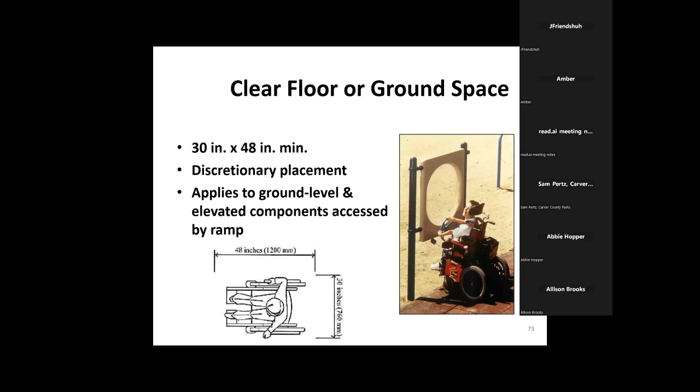That minimum clear space, a wheelchair parking space, is just like it is at a drinking fountain, it is at a sink, it's everywhere - it's 30 by 48 inches minimum. That's the minimum size. Mobility devices are getting bigger, people lay back farther, or people have their feet out farther. Those minimums, 30 by 48, are being increased by model building codes. So you may be in an area where your model building code has increased that clear floor space to more like 54 by, I think it's 36.

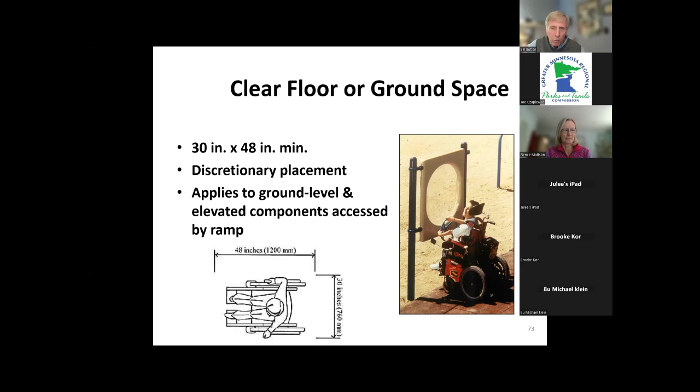Here I'm showing you some ground level play components that just have an entry point or a seat. They say you can transfer up to 24 inches of vertical height for a young kid. I think it's too high. I think really you should be going somewhere no higher than 18 inches to get onto a play component at ground level.

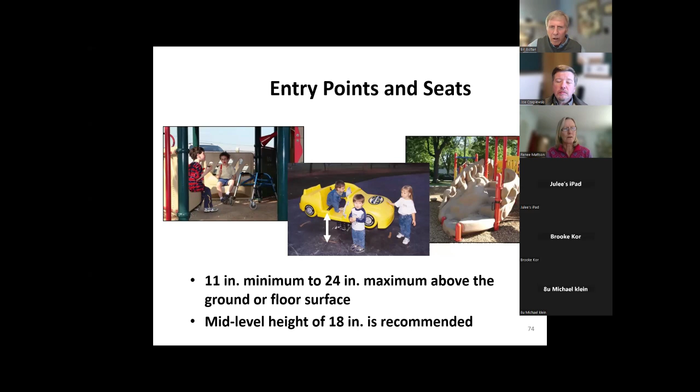I threw this in because I didn't know if you had any splash parks, but the water park requirements are exempted for the accessible routes. But you still have requirements if you're putting play components just with a water surface. You need to meet the play area requirements.

There's lots of resources that can help you besides this webinar or seminar. The Access Board has, as I showed you, a play area surface guide: 7 Things Every Playground Owner Should Know About Their Playground Surface. They also have a technical assistance guide, a guide to accessibility guidelines for the play areas. They also have frequently asked questions, and if you're altering an existing play area, go to the FAQs at the end. I've shown you here how you get on the website, how you get to that.

They also have completed research where we did a lot of work with engineered wood fiber, testing a lot of different surfaces to see how long they would last. Let me tell you this: the installation cost of engineered wood fiber is the cheapest. But over the life cycle, you're going to have the greater maintenance cost. You're going to be out there sometimes daily trying to rake the hole under the swing or slide again. So it may be the cheapest to install, but it might be the most expensive to maintain. Where the surfaces that are unitary, like the turfs or the unitary rubbers, they're more expensive to install, but they're cheaper to maintain. So you really need to pick your poison. Do you have maintenance staff that can really enable you to do a cheap install but handle a high maintenance cost?

I wanted to throw this in because one of the main things you really want to do is be able to evaluate that existing play area. Understand what you got, where are your barriers. That's the key thing. The ADA National Network has resources in every region around the country, at least till August. We'll see if funding keeps going.